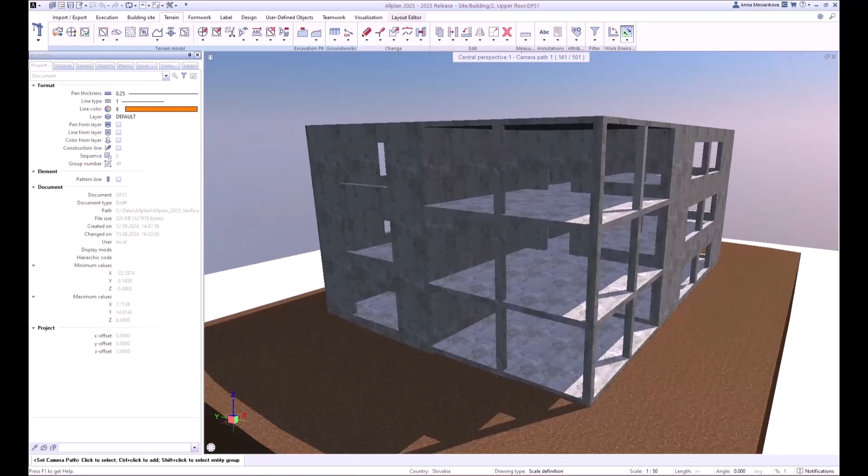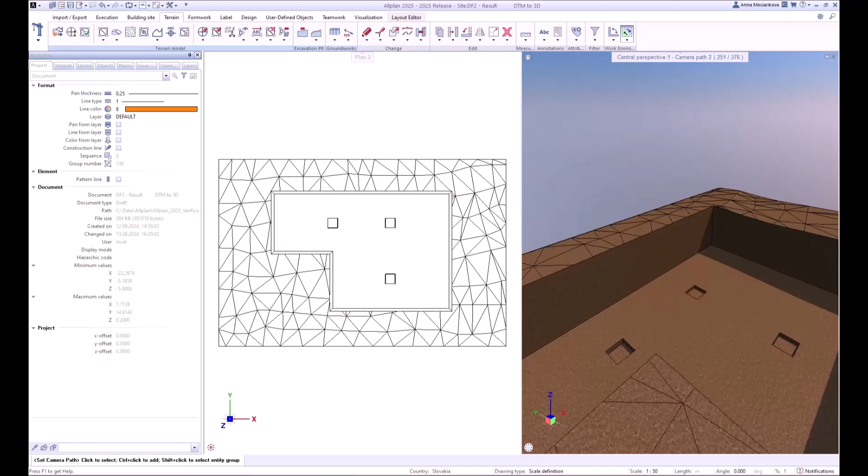Effective modeling of excavation in Allplan heavily relies on BIM-based planning. Allplan now supports accurate quantification of individual excavations with the added priority to the operators. As shown in the video, I am using the area shaped cut and fill tool for operator to create a general cut with priority 300, and for the foundations I am adding the priority of 200 to the cut to ensure the correct behavior. This promotes efficient cost estimation, resource allocation, and project preparation.

The updated excavation pit modeler allows users to add soil layers to their model. This approach contributes to the model's precision and helps with visualization and coordination. Alongside the new entry method for bored and soldier pile walls makes shoring planning easier and more flexible than ever before, supporting the standard Allplan methods for linear components.

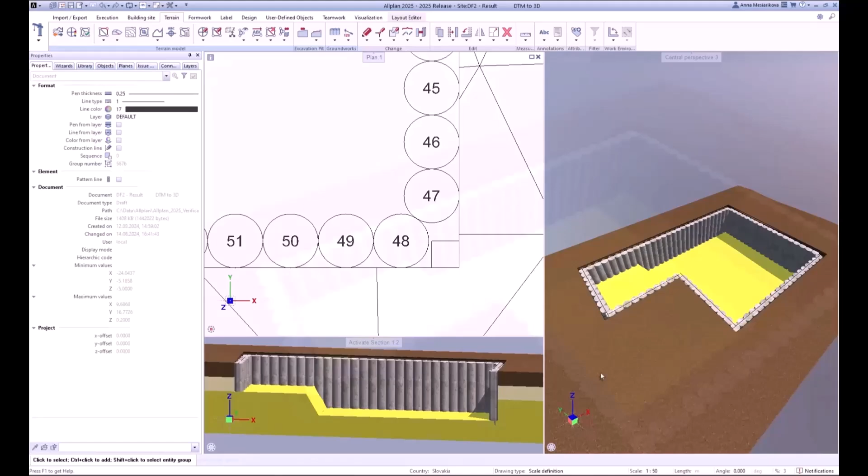Users can create region of the wall with desired geometry, and once they are happy with the outcome, they can close it and continue to plan the next one, as it was shown with the bored pile walls in the video. Moving on to the soldier pile wall, I am creating the first region with a profile length of 5 meters and the center distance is 1.3 meters.

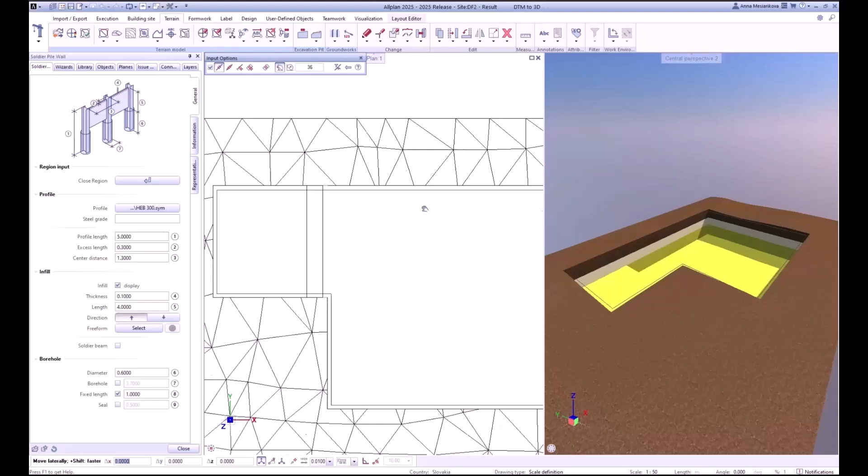Then I will close the region, and my next region has a profile length of 3.5 meters with the center distance being 1 meter. I will now finish my region, adjust it a little bit, and you can see that I have more control over my planning.

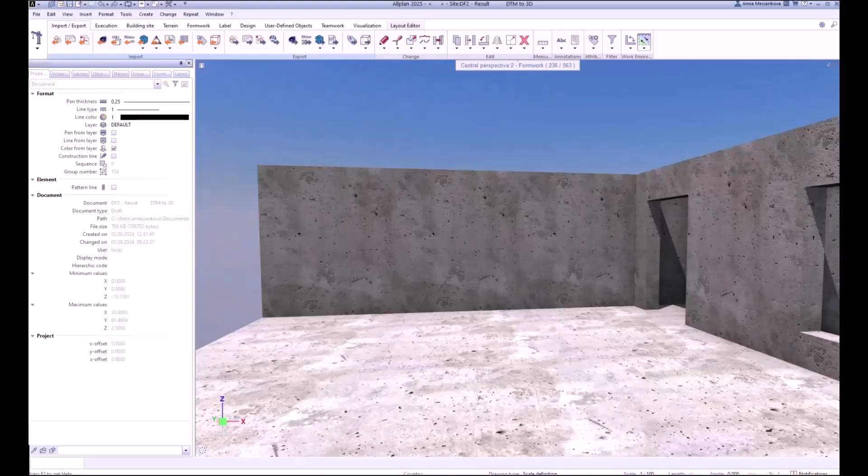Last but not the least, we are introducing the Formwork Storage Manager as a part of our ongoing efforts to automate the formwork planning. This innovative tool simplifies the formwork selection process, as you can see by selecting the used heights or selecting the specific formwork elements, which can then be saved.

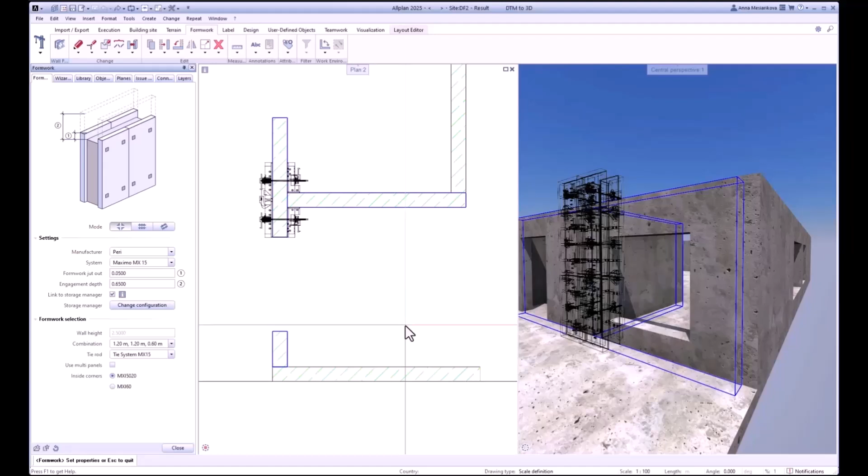The inclusion of Formwork Storage Manager in Formwork Planning tool significantly reduces the errors and enhances the overall ease of the planning process. You can also load the saved selection, which is very easy. You just need to hit the load button and select your exported file.

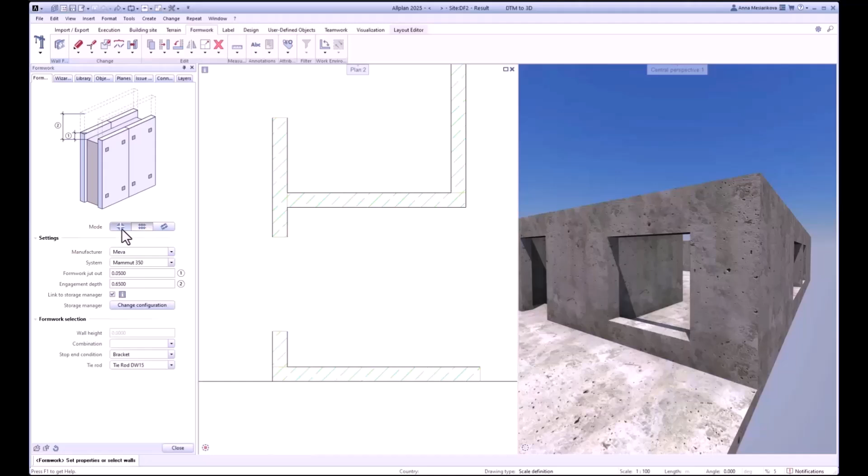Furthermore, to provide a comprehensive solution, Allplan offers the new Mammut system by Meva, complementing our existing portfolio.

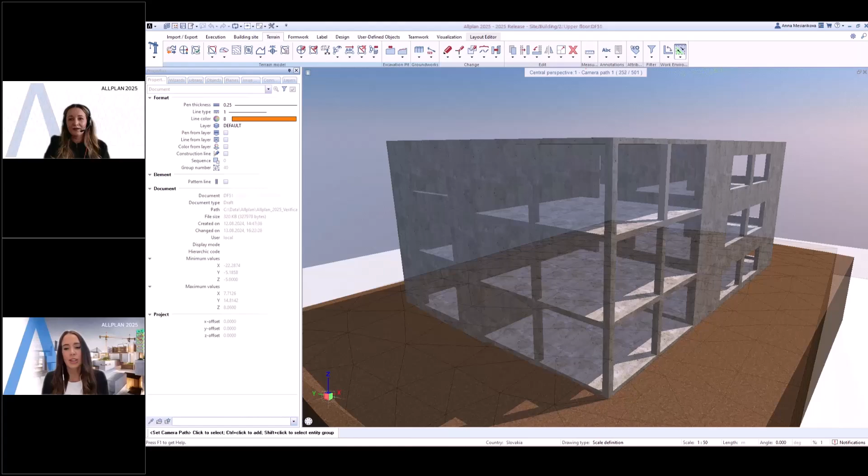Anna, what do you like most about the new version of Allplan? Well, I have to say it is everything we worked on. I truly believe, as I stated before, that the 2025 version is the best one so far.

That's great to hear, Anna. How can the functionality that you showed today have a positive impact on the work of the construction professionals? In short, it improves excavation pit modeling, simplifies shoring planning, and automates formwork selection, resulting in increased precision, flexibility, and efficiency. It's amazing to see the clear and long-term vision we have for Allplan, especially for 2025.

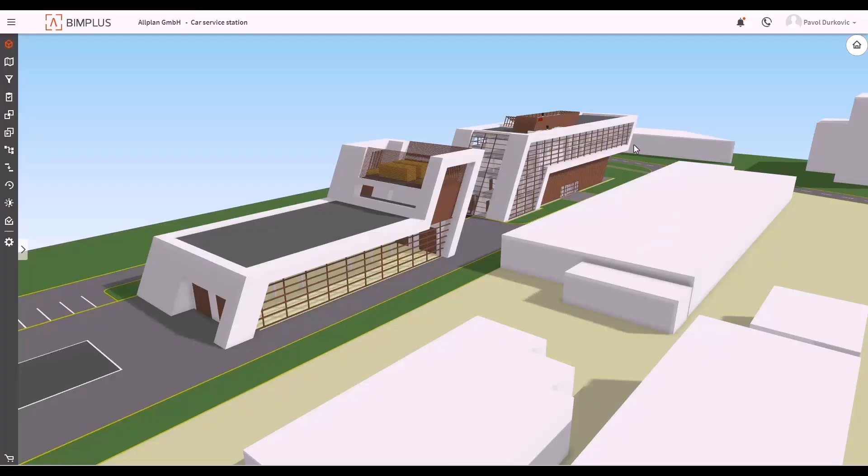Imagine me as a BIM coordinator. I get an email from the architect, and he updates the project documentation and sends it to the Bluebeam application. With the new integration between Bluebeam and Bimplus, I can access those files directly within Bimplus, and with one click I can import them into my project. Let's continue working with those files.

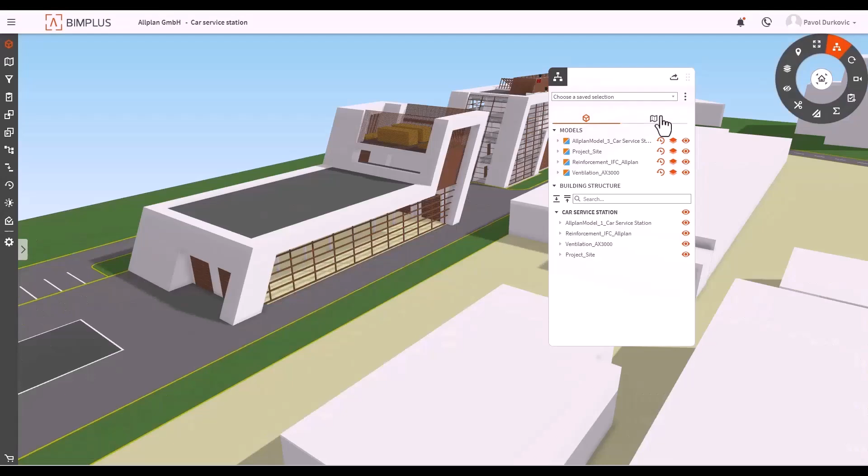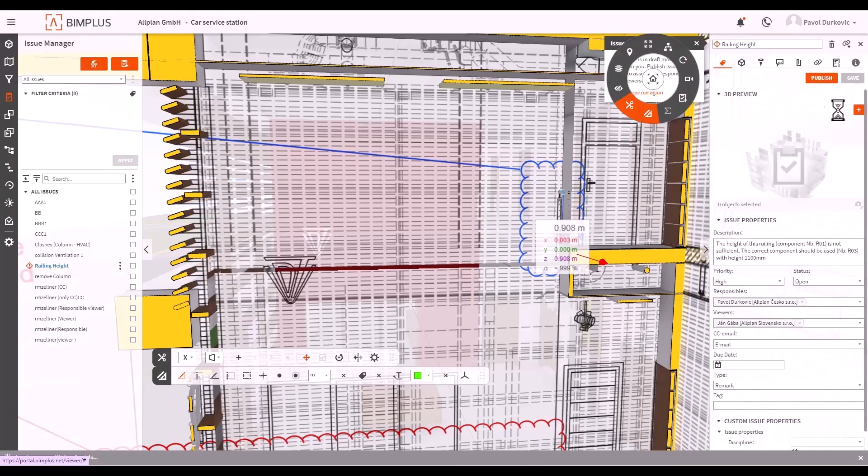Those are overlay PDFs I already created for you, and let's have a look what kind of remarks we have there. I need to make sure that the height of the railing is sufficient, so let's check the railing height. I simply check the measurements and I see it's not enough. So the logical move would be to click the issue button and create an issue to a dedicated person who is responsible for the height of the rail.

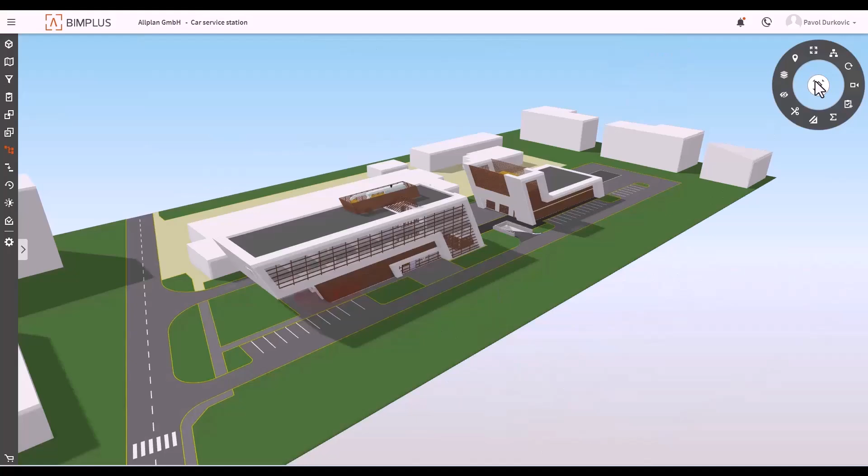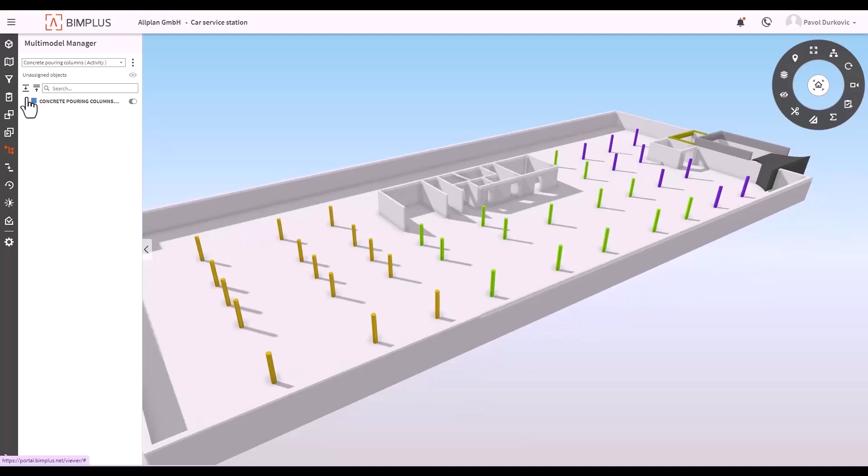That would be everything for the first use case. Let's move to the second one. Together with the site manager, we need to prepare a plan for how to pour concrete inside the columns in the basement. Let's divide them into 3 days of concrete pouring. I use the Multimodel Manager tool for it, and you can simply see by the coloring how many columns we need to pour per each day. So we just need to figure out how much concrete we need. Let's click the quantity takeoff button, and with a simple click we see that the total amount of concrete needed for all those columns is less than 4 cubic meters.

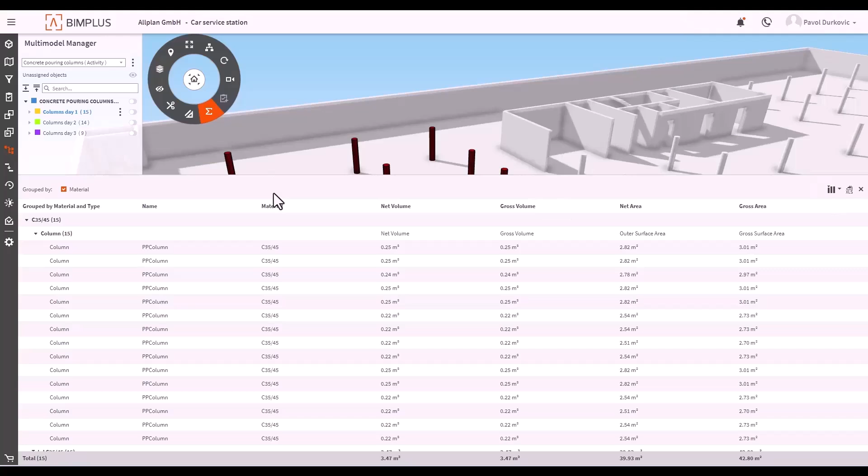And if I want to, I can even export this table into Excel, because everyone loves working with Excel, and I can even adjust the final number of concrete needed according to my needs.

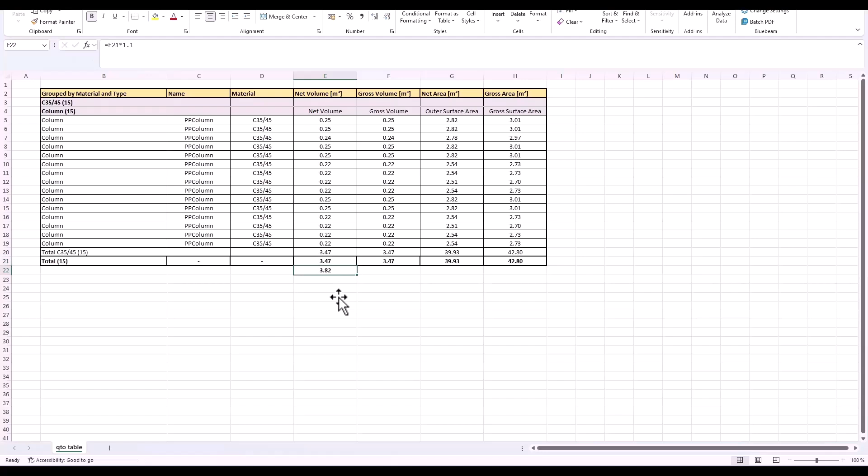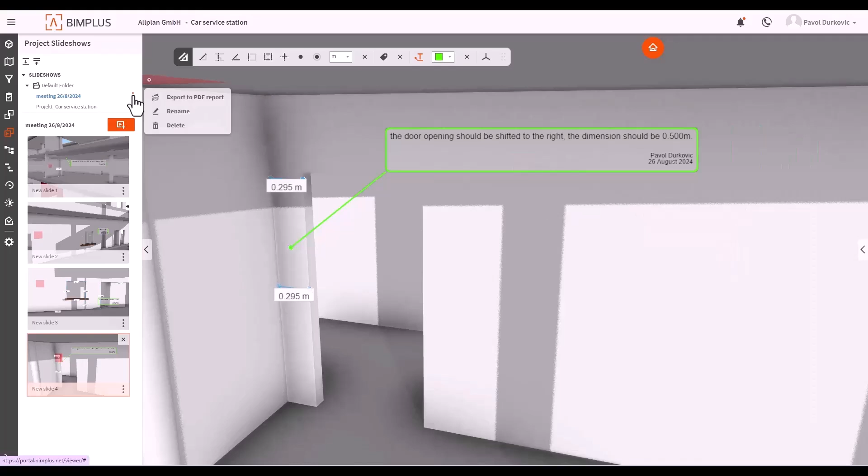All right, let's move to the very last video. Imagine we are sitting in a regular meeting with investors or civil engineering site managers, and we can discuss the progress on a site. We can deal with some issues, check some labels, and even add comments to specific issues, and all of these actions we can do within the project slideshows module. At the very end of the presentation, we can simply export those slides as a PDF report and send it to each dedicated person.

That would be everything from my side, so back to you, Kelsey.